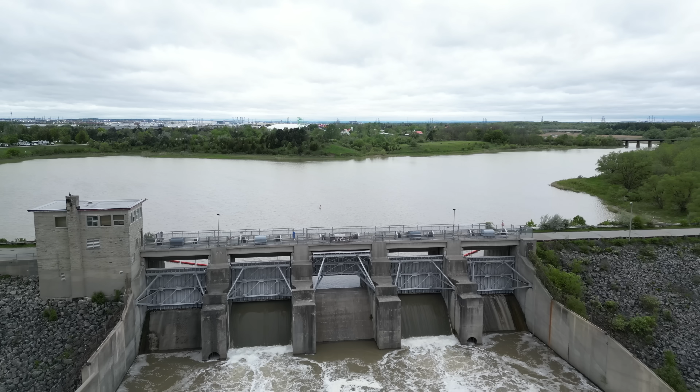And so we built these prisons, but not for people. But how does this stop flooding, and why have we built hundreds of them? Some are massive like this dam, and others hidden in plain sight.

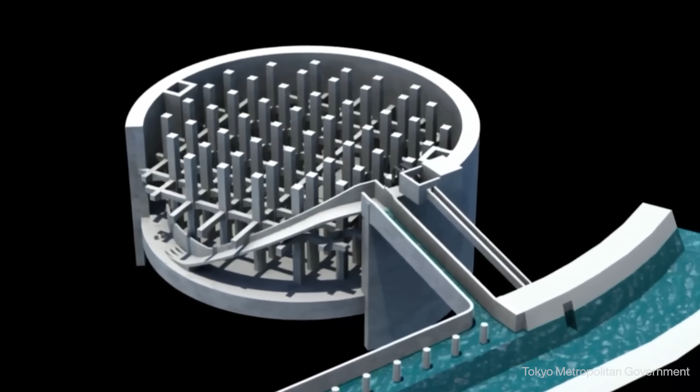To understand why we built these, we'll go on a journey to uncover how we went from water highways to water prisons. From Toronto to Tokyo, to explore why the Japanese built apartments designed to flood, spent $2 billion on an underground storage facility, and more importantly, what this means for the future of flooding in all our cities. Let's go.

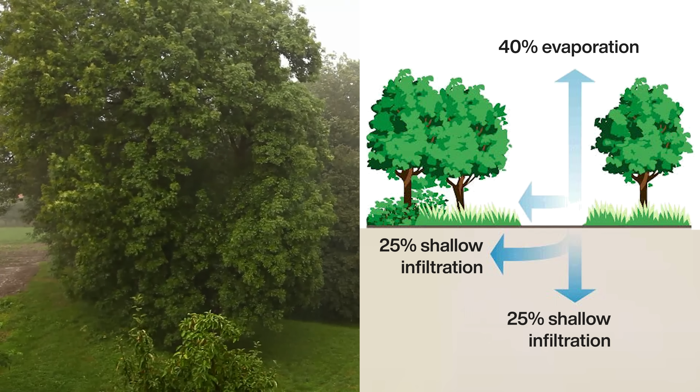More on them later. We've been dealing with rain for a long time, but it wasn't until ancient Rome where rain could cause big problems. You see, in natural settings, most of the rain would evaporate or soak into the soil, with only a small amount running off the surface.

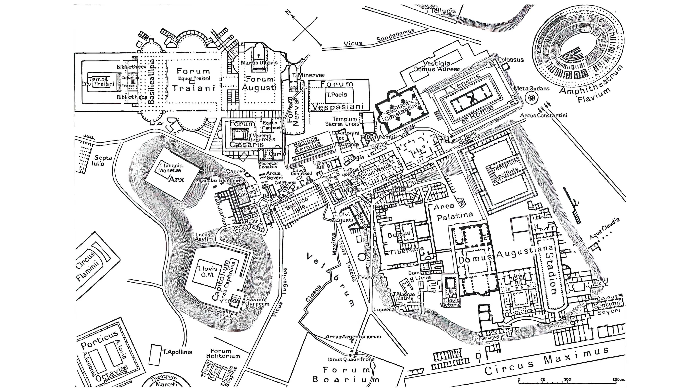It took rain off streets using drainage trenches and moved millions of liters of water into the river, far more than in the past. This was the height of sewer tech for a long time, as Rome would fall, plunging cities and technology into the Dark Ages.

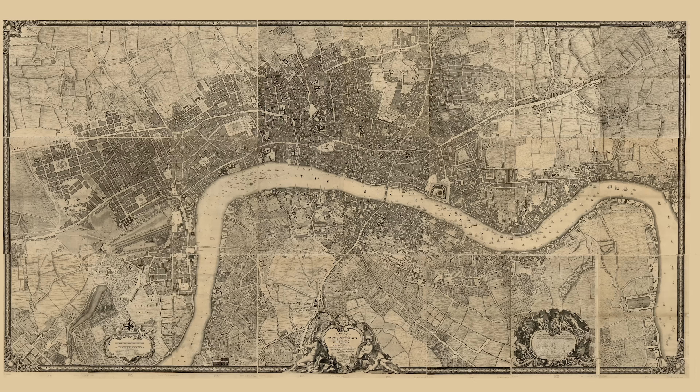But eventually things got better, and we're now in 19th century London, and it's become a bustling metropolis. Factories are everywhere, and people are flocking to the city for jobs. London's population has exploded from 750,000 in 1780 to a staggering 3 million in only 80 years, and with that comes a lot more stormwater to remove.

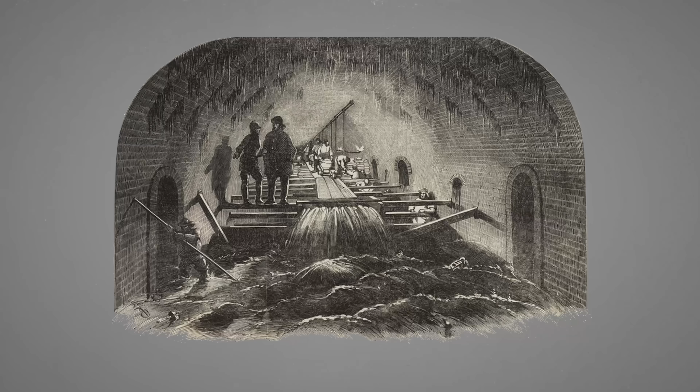By 1856, London's sewer network spanned hundreds of kilometers, far exceeding the Roman Empire. Many of these sewer lines are way bigger than the Cloaca Maxima, and they exit into the Thames River through a series of outfalls. This is way more water to manage, and the sewer system faces a new problem.

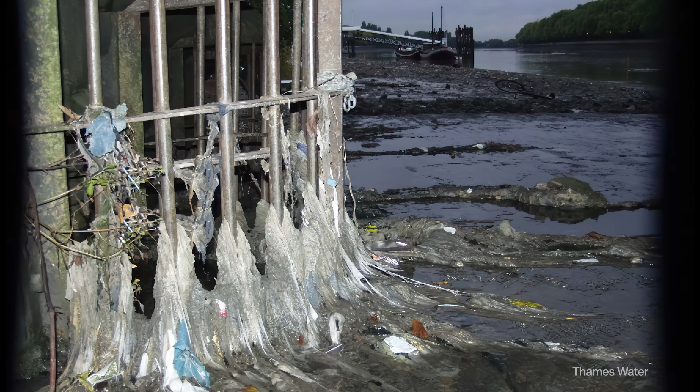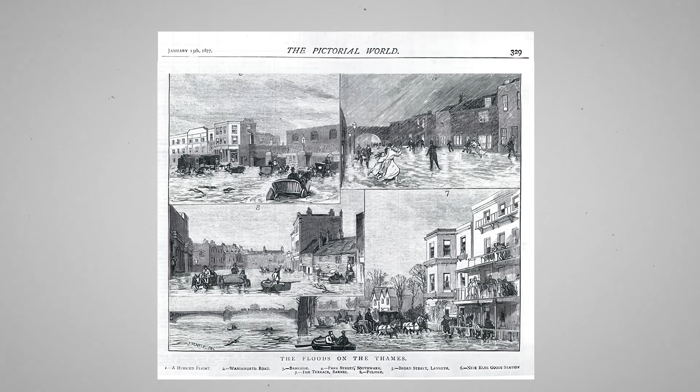An amazing invention called the water closet became widely available. And by the 1800s, over 250 million liters of wastewater were pouring into sewers daily and could cause serious blockages that would back up water into your home. And when it rained, disaster. Entire neighborhoods would be flooded.

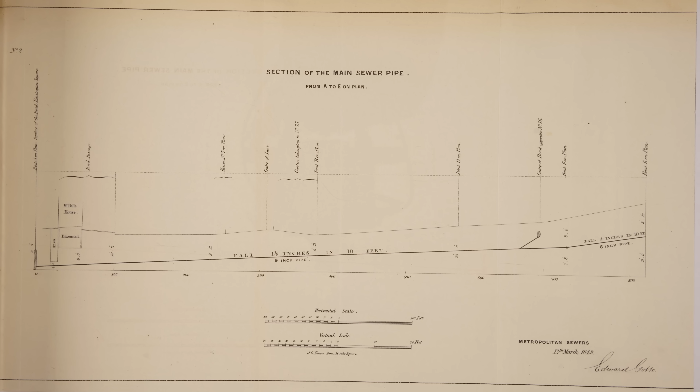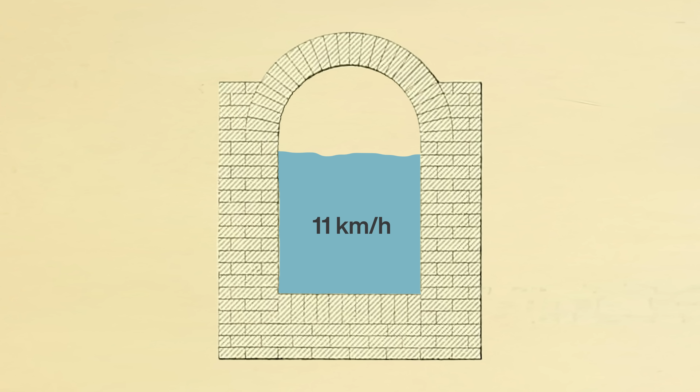London needed help, and the solution involved a massive and complex sewer project that's too big for this video. But we can dive into one important discovery. Speed was the cure for blockages, as this engineering guide pointed out. Many sewers had large flat bottoms that under low water levels created a lot of friction that slowed down the flow of wastewater, causing sediment to be deposited until sewers became completely choked, and then commenced those disgusting operations of sending men into them to remove the obstructions.

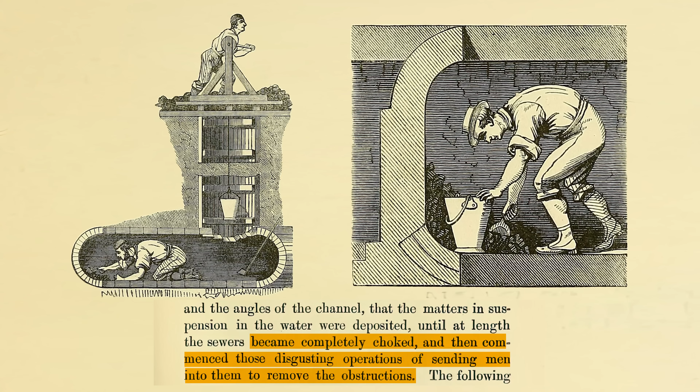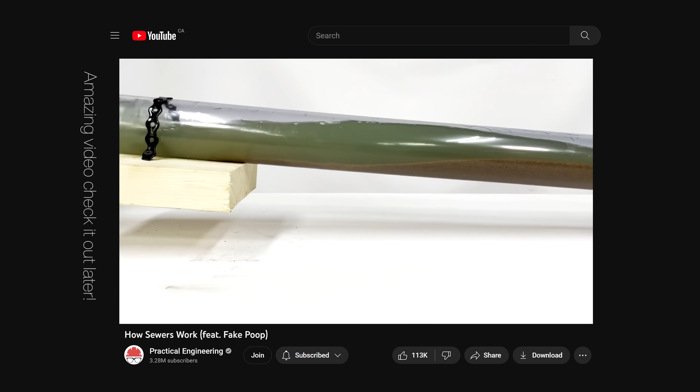Ugh. Better engineering fixed this. First, no more flat bottoms. Egg-shaped sewers were built to concentrate and reduce friction during low flow to keep everything moving. And also, Grady from Practical Engineering had a great demo showing how increasing the slope increases speed and would sweep out debris.

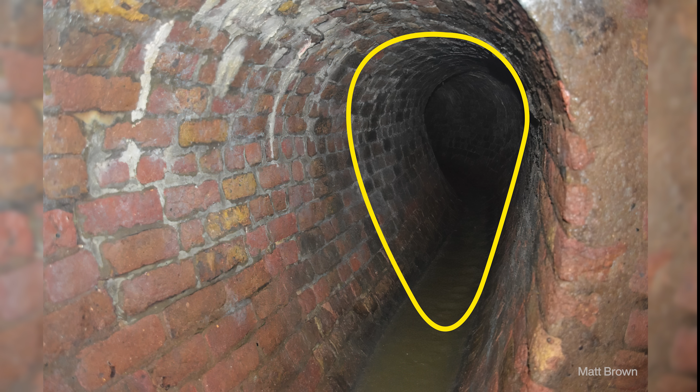And so, many experiments were done to find the velocity necessary to remove solid substances. Eventually, this self-cleansing knowledge saved London from blockages and flooding, and kicked off the speed revolution in sewers.

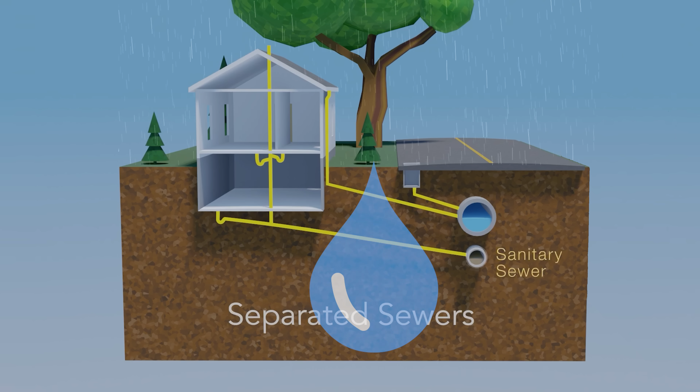This egg-shaped sewer tech made its way over to my city, and over time, faster and faster water removal became the way growing cities, including my own, were protected against flooding. Over decades, Toronto was transformed into a racetrack for rain. And it starts by angling properties and paved streets so the water flows directly and quickly into sewer inlets.

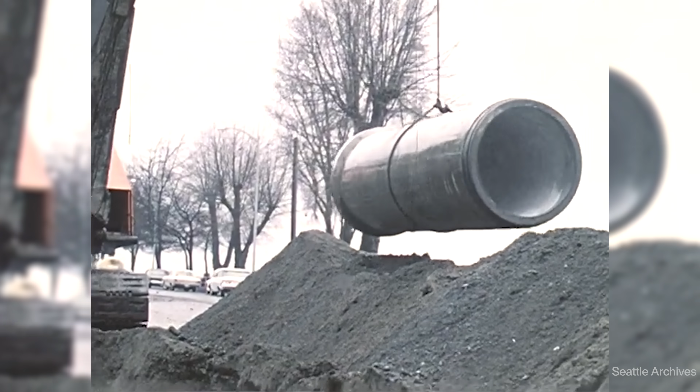In newer parts of the city, poop pipes are now separate from stormwater pipes, which minimizes the blockages that plagued London. We could then use concrete pipes that are larger, smoother, and better aligned, speeding things up even further. The rivers that received this water were also improved.

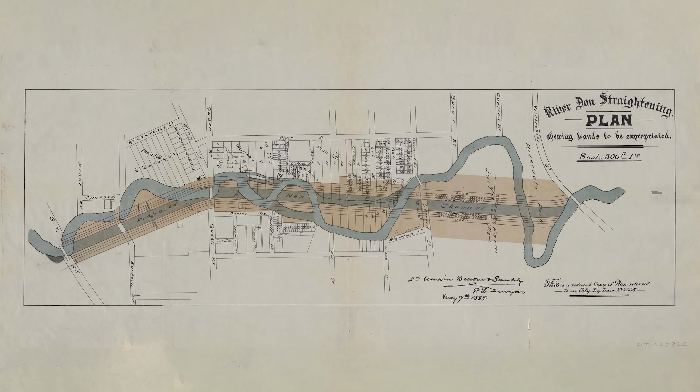Before, there'd be twists and turns, but these were too slow and hindered water movement during heavy rain, causing water levels to rise. And so we straightened and widened them in massive infrastructure projects. The result? Toronto can now dump more water into the river without flooding the surrounding area.

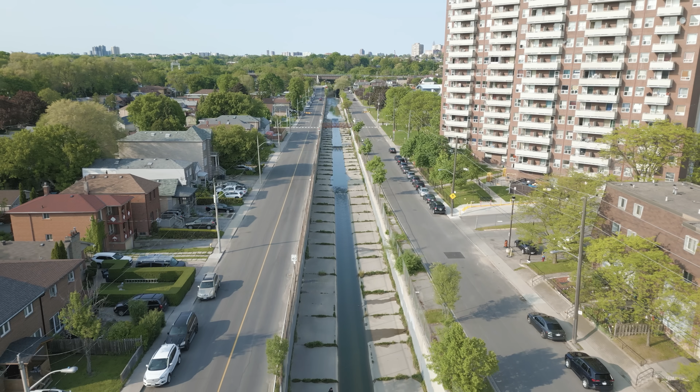But that's not all. We paved some rivers with concrete, which let even more water flow. And I want to show you the impact of this network when it rains. So we're here at Black Creek flood control channel. This is 4 kilometers of concrete highway that cuts across major residential areas and protects them from flooding. There's a second channel cut here for low flow, and do you remember why we did this?

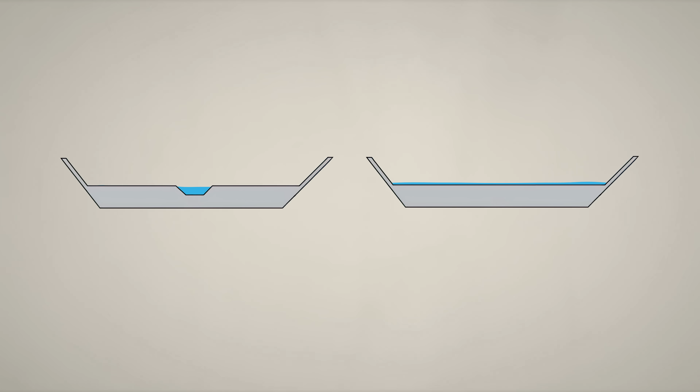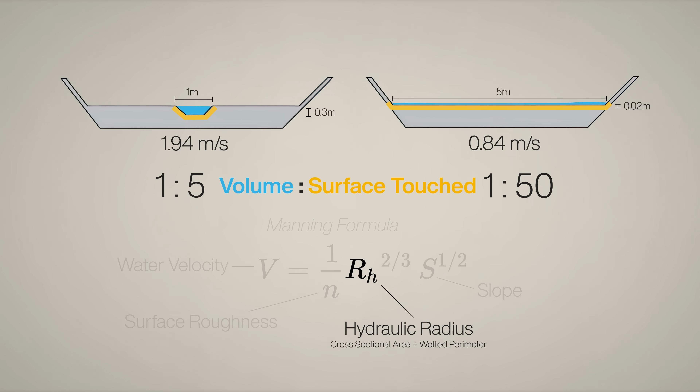It's the egg-shaped sewer all over again. This concentrates water to maintain the self-cleansing velocity. Without it, the speed would be halved, and we can calculate this through the Manning formula, which estimates water velocity. The variable changed here is the hydraulic radius, which compares volume against how much surface area it touches. And in the flat channel, it's 10 times more, which slows down flow, and now you know the science behind it.

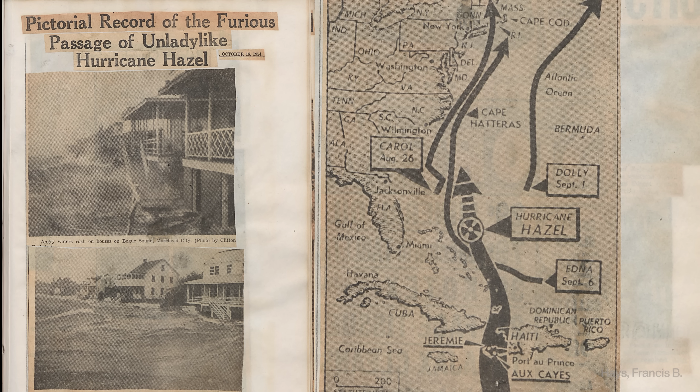That's why people were calm as Hurricane Hazel was raging towards Toronto in 1954. The day before, the local newspaper didn't think much of it. Just some minor flooding and heavy rain. Overnight, the storm struck, and by the next day, everything changed. Drownings, falling trees, crushed homes, and washed out bridges. Some rivers ran as much as 16 feet above their normal level.

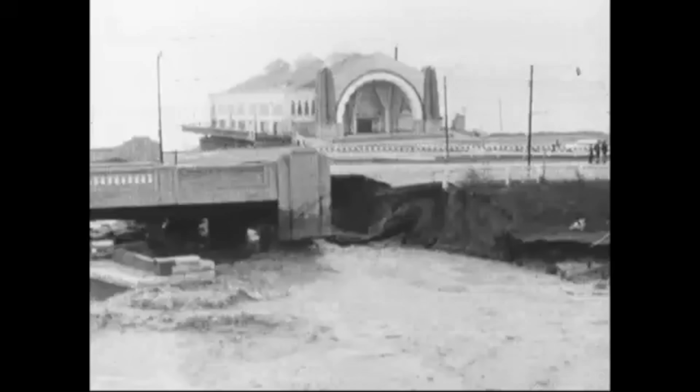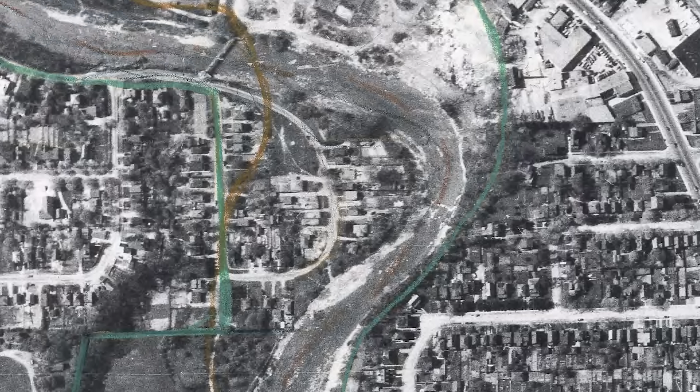Much of the destruction was around rivers as it swelled and washed away roads, bridges, and buildings. I'm standing at one such location. This is Raymore Drive, or it used to be. It had 14 homes along the peninsula section here. During the storm, the Humber River rose and washed away all those houses, killing 35.

And it's never been rebuilt, instead being turned into a park and a memorial. In total, Hurricane Hazel killed 81 across the province as the storm stalled over Toronto, unleashing 8 inches of rain. But like all great cities, Toronto rose up, fixed the damage, and started looking for someone to blame. Turns out, we caused it.

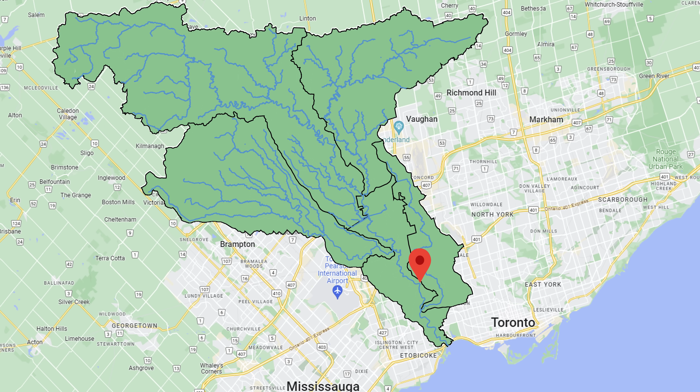We underestimated the power of nature like the Humber River, and it doesn't look big here. But zoom out, here's where I am, and we find the river connects to 1,800 kilometers of waterways that drains 911 square kilometers of land. It's massive, and during Hazel, the storm paused on top of all of this, and rain was funneled downstream, like a snowball rolling downhill, until it arrives here, sweeping away homes and washing away bridges. Speed was the problem, and now the water running into the river has made the problem even worse.

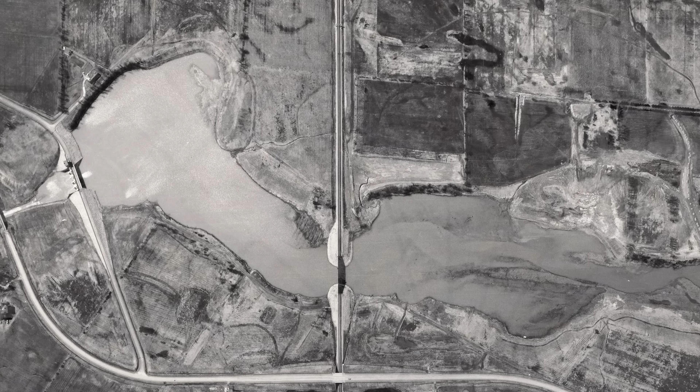Figuring out how to fix this took 5 years, and in 1959, Toronto had a bold new plan. One part was the Flood Control Works program. Toronto built infrastructure like the Clairville Dam to reduce the power of rivers. Its job is to keep rainwater out of Toronto, and let's see how. The before and after shots give a good overview. A winding river was turned into a prison complex for rain.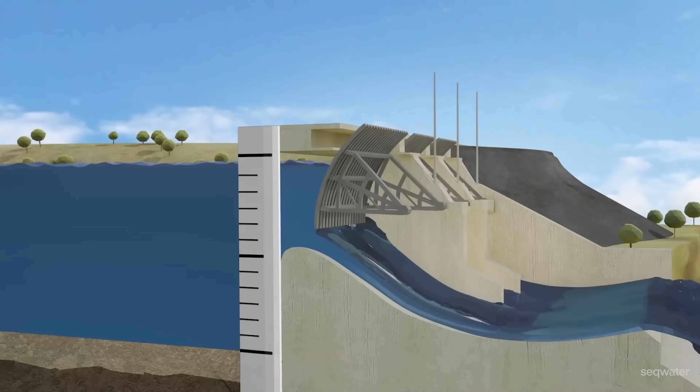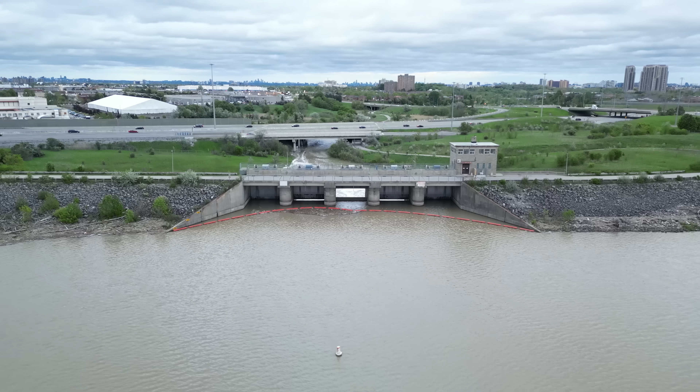It does this by trapping and releasing water using massive floodgates, and is controlled through a monitoring station that, upon detecting a big storm, can open the gates and drain the reservoir as needed to make room for more water. The gates then partially close, and the dam will hold back most of the rain coming down and prevent it from reaching Toronto. When the storm passes, the gates can open and water safely released into a much calmer river. Toronto built several of these dams and greatly reduced flooding.

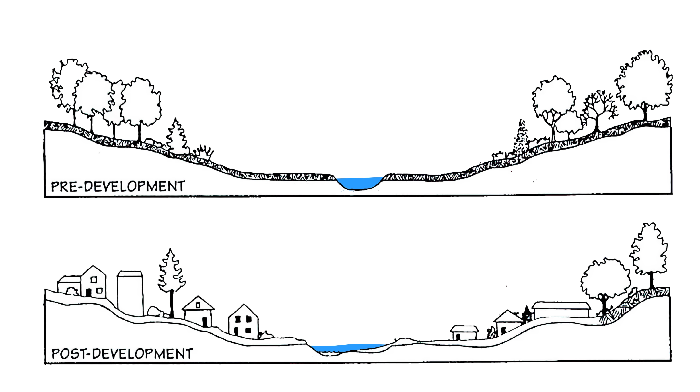The other part of the plan was the lands acquisition program. This may be obvious now, but building and living on floodplains wasn't the brightest idea, especially as urbanization changed how high and how much areas will flood. And so a regulatory body called the TRCA was created. They bought up threatened homes, turned them into parks, and protected them from short-sighted developers. Since then, no one has died by their home being swept away by water in Toronto.

Congrats, right? Absolutely. And sewers are still being overwhelmed in big storms, causing huge damage. But we can't put a dam in your street, so we needed something different. The solution is right here. Hidden in plain sight, disguised as your friendly neighborhood soccer field. There are two things that make this place a little unusual. First off, this soccer field is in a really deep pit. Whew. That goes really far down, and that's not the only unusual thing about this pit, but also the structure beside me and on the opposite side of the field.

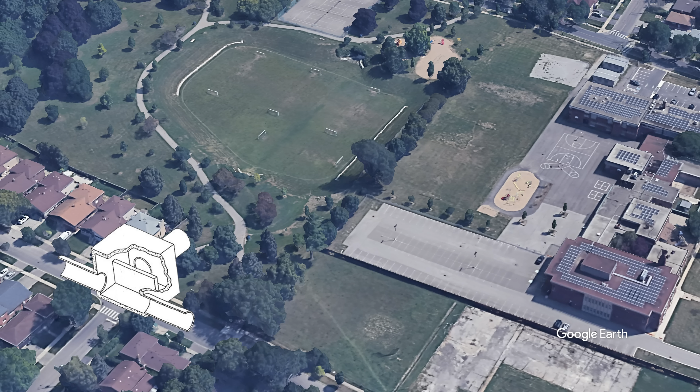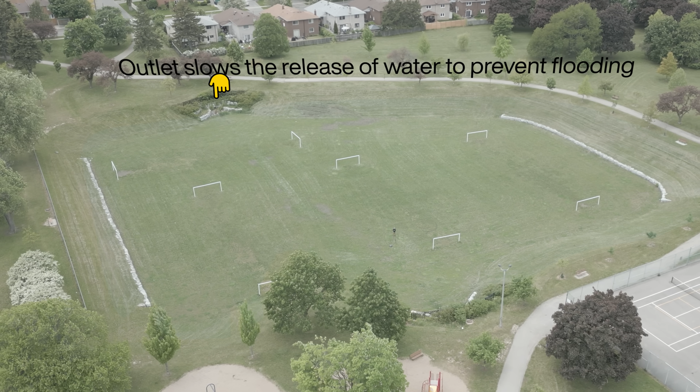These are water inlets and outlets, and the secret to turning this soccer pit into a prison for water called a dry retention pond. During heavy rain, water will overflow a nearby underground weir and will travel down a pipe into the park and enter through these inlets where the rocks break up its energy, and water will fill this pit until the storm passes, reducing pressure and volume in downstream pipes, and ensures that we get less of this. But how is this saving the city? A little bit small, no? That's why we use a whole ton more of them.

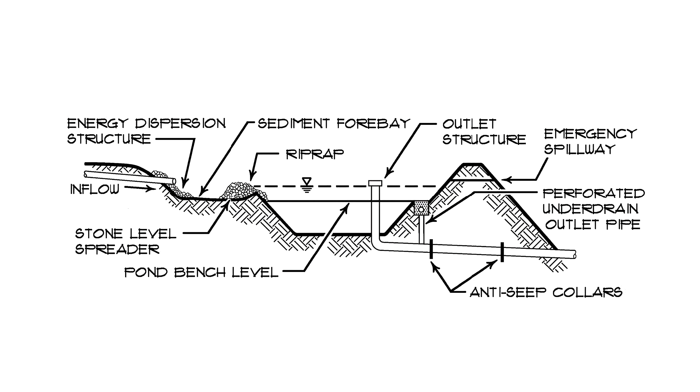Through the power of editing, we're at a much more basic pond, but even this one has a secret feature that protects the neighborhood if it overflows. And it's right here where I'm standing. Doesn't look like much, but let's go higher. And we'll switch to the technical drawings, where we'll see it's labeled emergency spillway. This area is lower, and just like a spout on a measuring cup, if the pond overflows, water is directed downhill towards the nearby stream instead of homes.

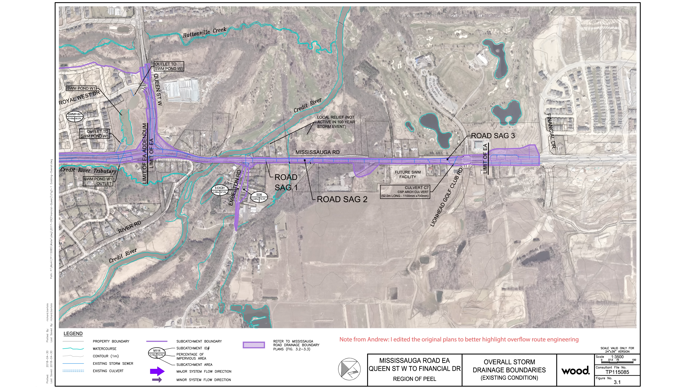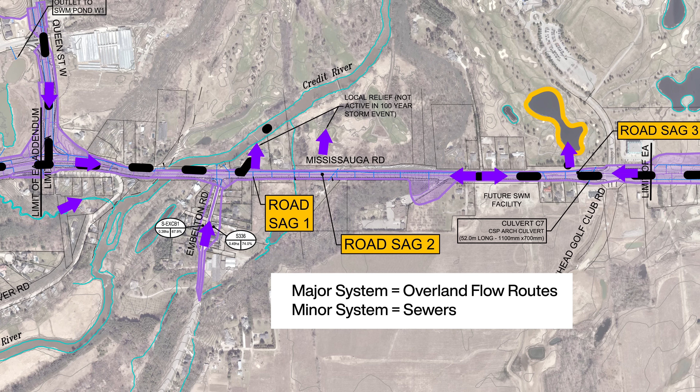This is called overland flow, and it's also designed as a failsafe for modern city streets when sewers overflow. If we look at city engineering plans, the large purple arrows show how roads are designed to convey water to places where the road sags and water is safely directed into nearby rivers or even golf course ponds. This is known as the major system in stormwater design and part of the protections for newer neighborhoods and most retention ponds that you probably didn't know existed.

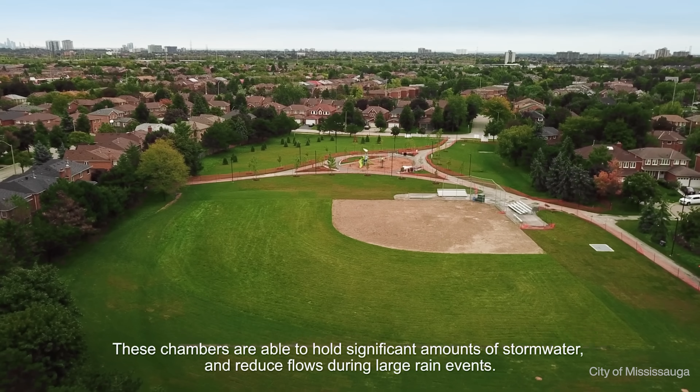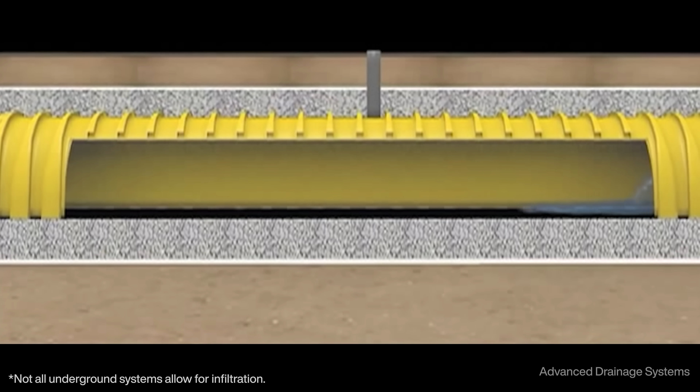But sometimes there's not enough space for a pond and we need a different solution. And it's right here? Where is it? It's actually down below, and there are rows of buried tubes that are built using large interlinked chambers and can store stormwater underground. You might notice the bottoms are not sealed, and that's on purpose to allow for a process called infiltration. That lets rainwater seep into the ground, which keeps this water out of the sewer and restores the natural flow back into the groundwater, which is used by plants and for drinking water.

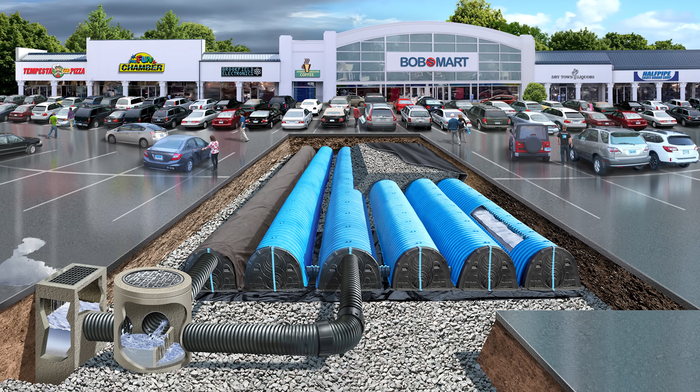It's also not just parks, but many malls and commercial sites are required to install these systems. And so it's all around you: sewer pipes, channels, dry ponds, wet ponds, dams. And by the 2000s, Toronto and many other cities thought they knew how to predict rain, knew how to build communities and keep them safe.

I know how to do it. You know nothing. Pakistan has had some of its worst flooding ever this year. Scientists say climate change has made the disaster worse. And all the time, the question of whether flooding will be worse in future. Having a pool party in my own house.

Woo! Toronto has been hit with 8 times more major storms than expected in the last 15 years. The one in 2018 nearly overtopped the channel and caused extensive flooding elsewhere. And we're fighting back, expanding channels like this one, building more water storage and bigger sewers. But it had me wondering, what will the future look like as cities grow, along with severe rainstorms? Let's delve into 2 different cities to see what the upgrades to this infrastructure might look like.

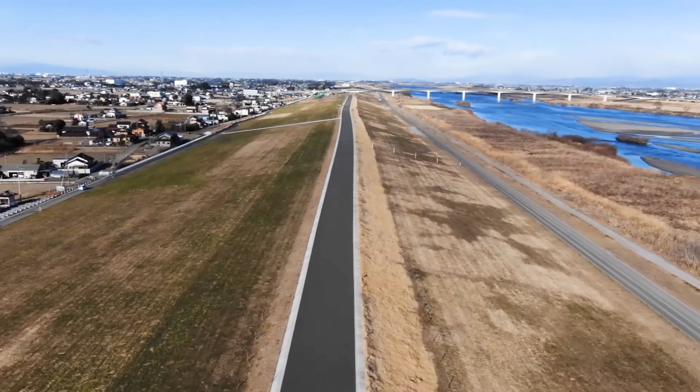First up, Tokyo. This city uses infrastructure to subjugate and control nature on a massive scale. Let's go. Our first stop is this apartment building at Tetsugakudo Park Heights. The building doesn't look that special. It's another apartment located close to the river, although the area is quite gorgeous. But what if I told you that if you lived here and saw the rec area flooded, not only is it fine, but expected? Weird, right?

Not for residents here. The building is designed as a retention pond. When the river rises too high, it's designed to flow over this wall, which is lower than the surrounding embankment. It then floods into the recreational complex and even under the building to capture excess water that might flood the neighborhood. But what about the building? Will it be damaged? As we walk around, you might notice something interesting. There's nothing underneath. It's on stilts, and this keeps the building safe. But why go to these extreme lengths?

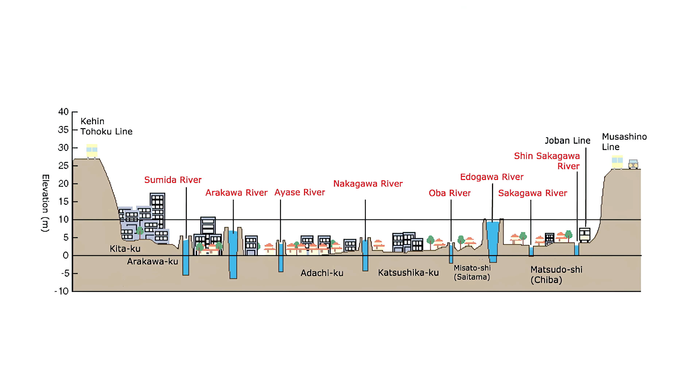The answer is money and space. Tokyo has 14 million people and it's heavily urbanized. Buildings are placed up against major rivers to make the most of the room available. The danger is the rivers are above the height of the city, which means Tokyo is one giant floodplain that can cause tens of billions of dollars in damage and many deaths if the river overflows, as it has in the past. Tokyo's government simulated the damage should an embankment break in a major area, and it's chaos. Subways flooded, major neighborhoods taken out, Tokyo paralyzed. So they have to protect the city at all costs, which includes expensive and unusual retention ponds as one part of that strategy.

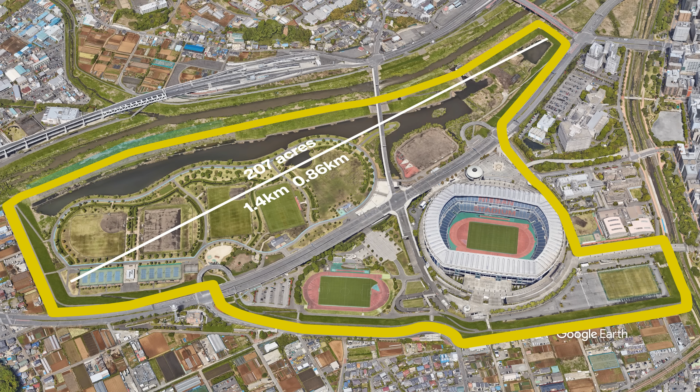But what if you need more than a tennis court? A lot more. This is Nissan Stadium and Shin Yokohama Park, which contains 6 large sports fields and rec areas spread across 1.4 kilometers, and it's all designed to flood. If we look from one end of the park, it's a giant basin and at full capacity can contain 3.9 billion liters of water. The secret to making this work is this 200-meter dip in the berm that protects the city from the river. In this up-close shot, you can clearly see how it's been lowered.

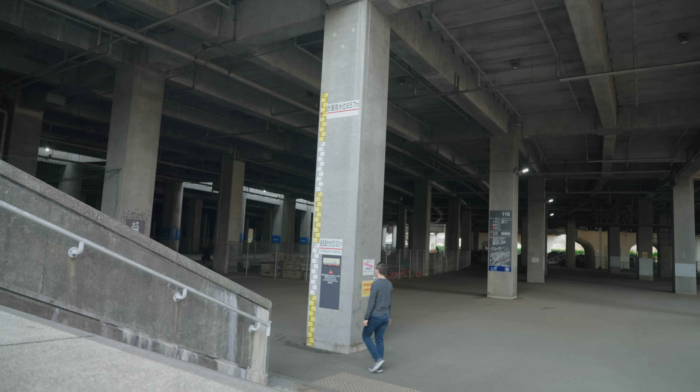And looking from the side, we can see how water will stream across when the river becomes flooded into the outermost part of the park, which is the easiest to clean up. And if water keeps coming, it'll fill the rest of the complex. Oh, and how is the arena protected? With stilts, of course. This is how high it flooded before, and that won't cause any damage or interruptions even during a World Rugby event.

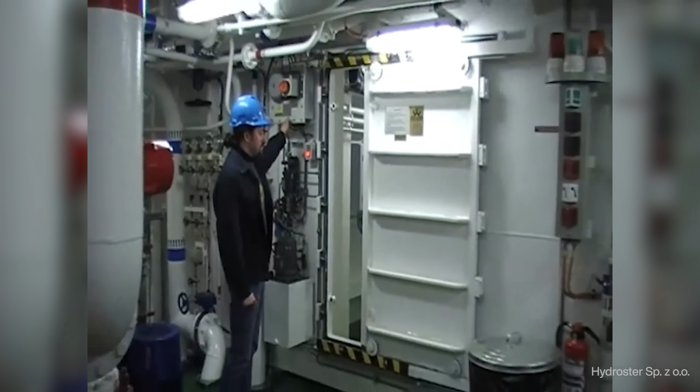But what about buildings inside the park? I saw photos like this that showed them underwater. When you get close, you'll see something unusual. They have these chunky windows and doors that are found on the ground floor of this entire building. Think ship doors. You know the ones that keep them from sinking? That's it right here, and these small details made me appreciate the thoughtfulness and multi-purpose nature of this complex.

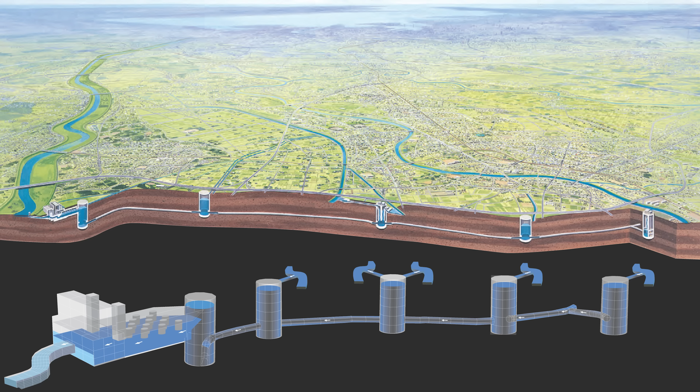And Japan makes it easy to visit other pieces of infrastructure, and I'd rather do that than visit the usual tourist sites. There's a place 56 kilometers north of the stadium that I really wanted to see. It's there. This is the $2 billion metropolitan area outer underground discharge channel, and it captures water from 5 rivers and stores it in massive underground silos that each are big enough to hold the Space Shuttle or the Statue of Liberty. We started the tour in the pressure regulating section, and experiencing the scale of this facility was intense.

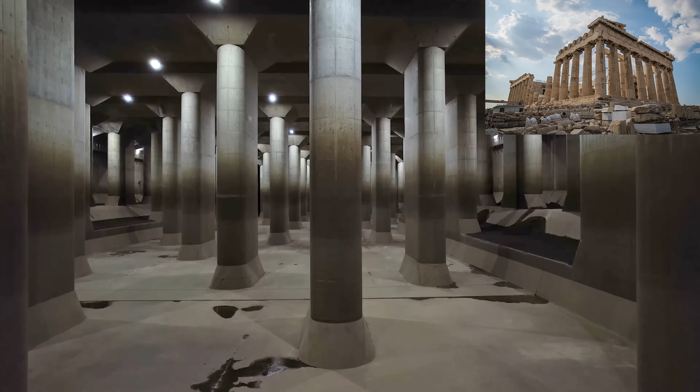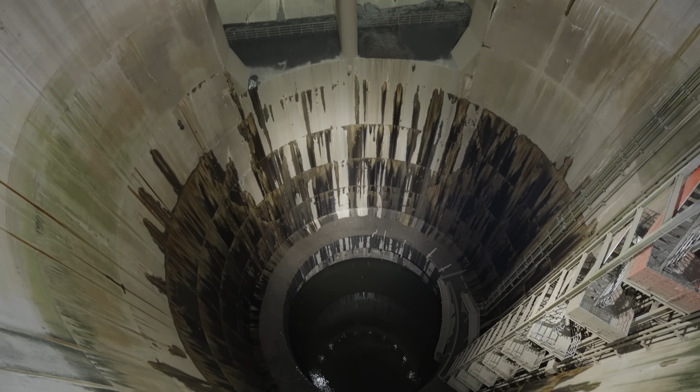It's nicknamed the Temple for obvious reasons. Oh, side note, tons of movies and TV shows have been shot here, and even Pharrell has visited. We were later taken to walk around one of these storage tanks and look down to see the section we were just in. Here's a person for scale, and it looks so tiny up here. I had a ton of fun, and I could better understand how much goes into protecting Tokyo and why they would spend billions to do so.

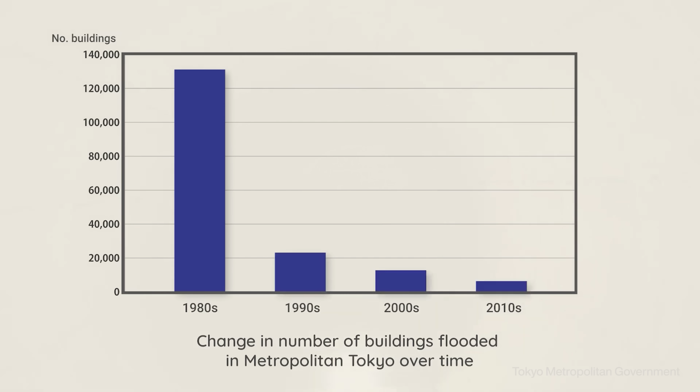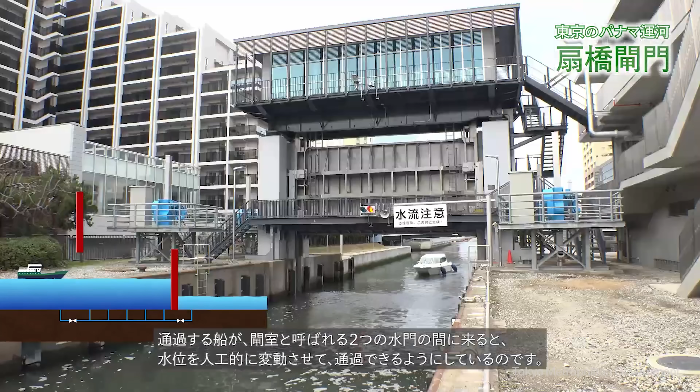These projects are working. The stats for Tokyo show a huge drop in flooding over decades. But the cost is enormous, not only in billions spent, but the destruction of the natural environment. Nearly all the rivers through Tokyo have been paved over, and many retention ponds are far from natural. Is this the price for making bigger cities? But maybe the problem is that we fight nature. And what if the solution is the opposite and we work with it instead?

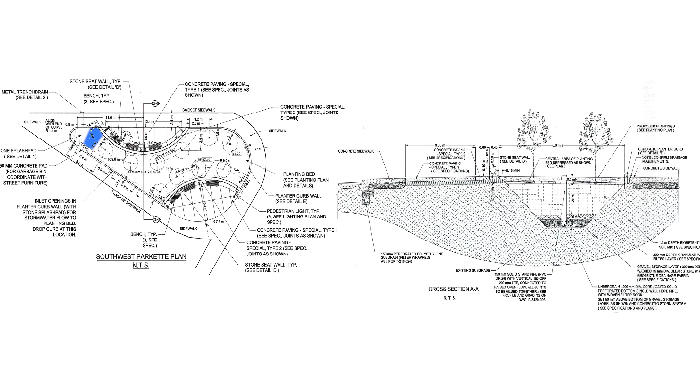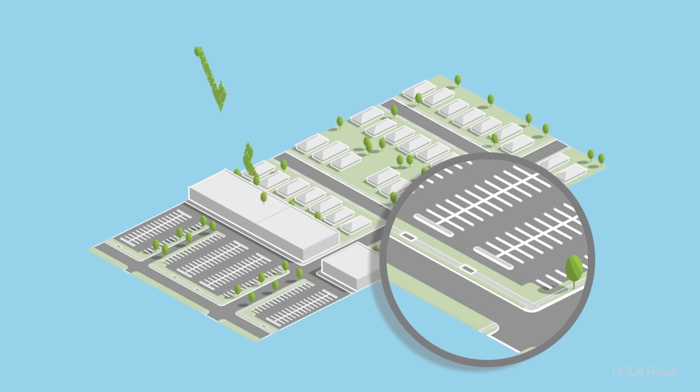That takes us to this. It's a garden and it's also a sponge. It takes stormwater off the streets through this grate here, where it percolates through the soil, holds and filters the water before releasing it. The goal is to avoid expensive, centralized storage and instead use more and smaller infrastructure to keep rain out of sewers. There are many types of these systems, and if you build enough, the city becomes a giant and beautiful sponge that rolls back the problem with urbanization. This is called green infrastructure or low-impact development.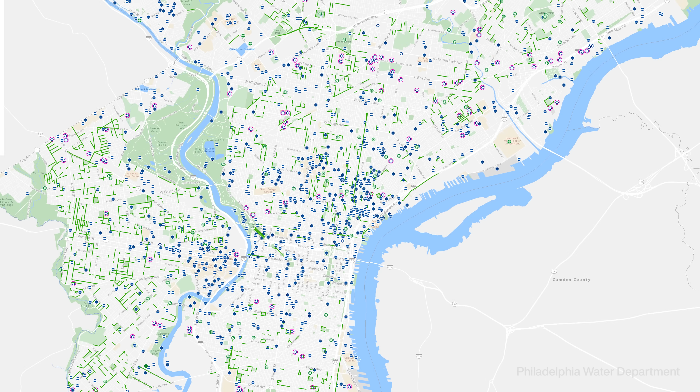Today, many cities are green curious, but some like Philadelphia have delved in deep. This map shows an incredible 12-year effort, hundreds of projects that cover 1,700 acres. They put green infrastructure everywhere, including schools, roadsides, and private land. It beautifies the city of the Fresh Prince, and more importantly, fixed a major pollution issue for cheap, saving billions of dollars.

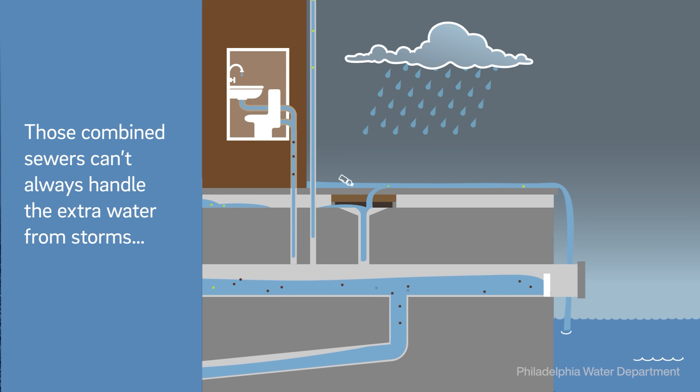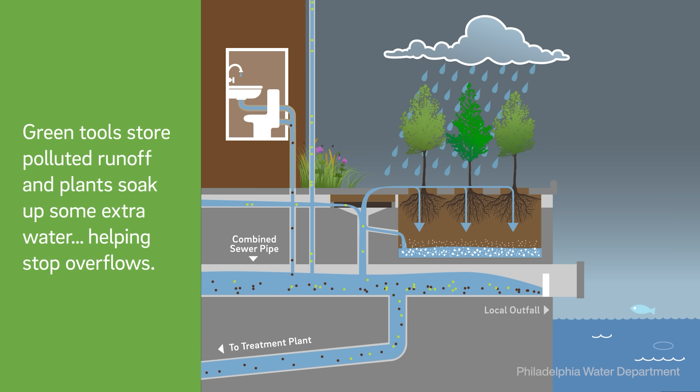Philadelphia had raw sewage being dumped into rivers during major storms, and they were ordered to fix this. Traditional grey infrastructure like the ones being built in London would have cost over $8 billion. Green infrastructure cost 75% less, but at city scales was unproven at the time. It's a risk that paid off for Philadelphia. I would need a full video to explain all of this, as water quality is a huge part of stormwater management. As to flooding reduction, Philadelphia hasn't published any stats except the billions kept out of waterways.

Other cities are investing heavily in green infrastructure, but it's just the beginning, as this technology is starting to be widely adopted. Heavier rain is coming to all of our cities, and I can't tell you whether yours will go down the gray Tokyo or the green Philadelphia path. Probably a combination of both.